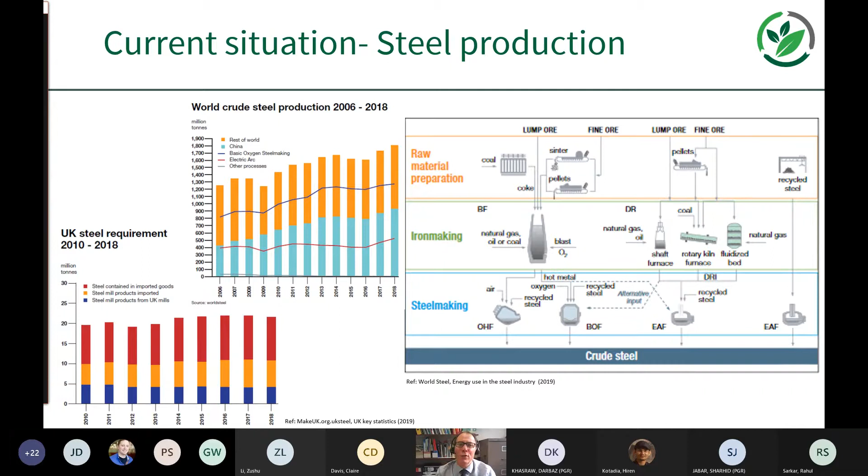Those raw materials then go into the iron making process, and then into a basic oxygen furnace. On the right-hand side, we've got the other end of the spectrum, which would be recycled steel going into the electric arc furnace. In between, we've got other technologies which, although currently well developed, are not always well used - direct reduced iron, shaft furnaces, rotary kiln furnaces, fluidized bed, and a range of other production routes in between the blast furnace and the electric arc furnace.

So what about worldwide production? Well, I guess what I want to emphasize in this slide is that, first of all, global crude steel production in 2019 was 1.8 billion tonnes. It's a massive amount of production there, and it's dominated by two technologies, really: the blast furnace and the electric arc furnace.

The blast furnace itself takes up the majority. About 70% of global steel production is from the blast furnace. And that represents primary production, about 90% of the primary production. And so what we're referring to there is production from mined iron ore, iron oxide, or a variety of different iron oxides.

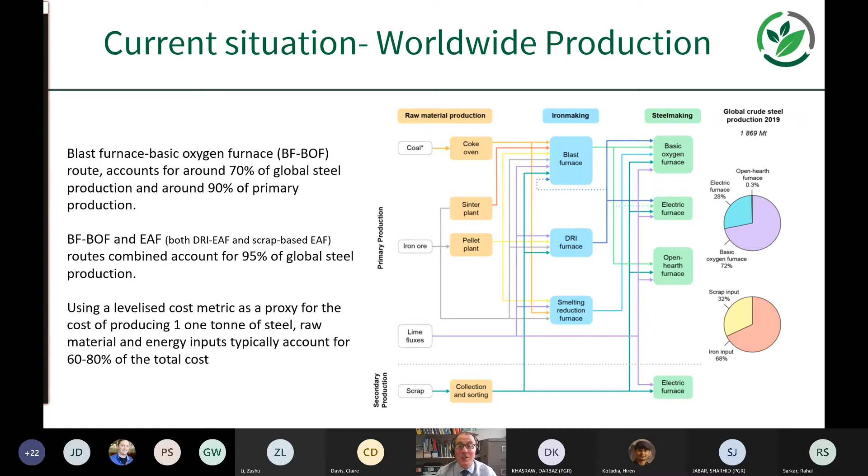Then the electric arc furnace and the blast furnace combined account for 95% of all steel production. So it's dominated by these two real technologies, even though we've got other options open to us. And I think at this point, it's worth emphasizing that it looks like this situation is set for a big change now, because when we're considering reducing CO2 emissions, we're starting to look at some of these other technologies and combinations of those technologies.

So where are we with the current situation with regard to CO2 emissions? On the top left-hand side, I've got a table from the International Energy Agency Iron and Steel Technology Roadmap. They produced a roadmap at the end of last year, actually, that emphasizes where we're at in terms of the specific intensity of CO2 per ton of hot metal. And there's some variation in the amount of CO2 produced per ton.

As you'd imagine, there's a variety of different scales and efficiencies of plant around the world. But basically what we're emphasizing is that the blast furnace has a higher specific intensity, so we're around a couple of tons of CO2 per ton of hot metal. Then the directly reduced iron, which might go into an electric arc furnace, is less. And then the lowest of the current technologies adopted is the scrap-based electric arc furnace, at 0.3 tons CO2 per ton of hot metal out of that furnace - quite a considerable difference.

And in terms of global greenhouse gas emissions, iron and steel is a big part of 2.6 gigatons of CO2 emissions per year, so it produces a lot of emissions. As a percentage, it's usually represented as a percentage of the energy sector's greenhouse gas emissions, where it's 7.2% of those overall energy emissions, and a lower percentage as a percentage of the total greenhouse gas emissions, which are around 49 gigatons of CO2 equivalents per year. So it's a big producer.

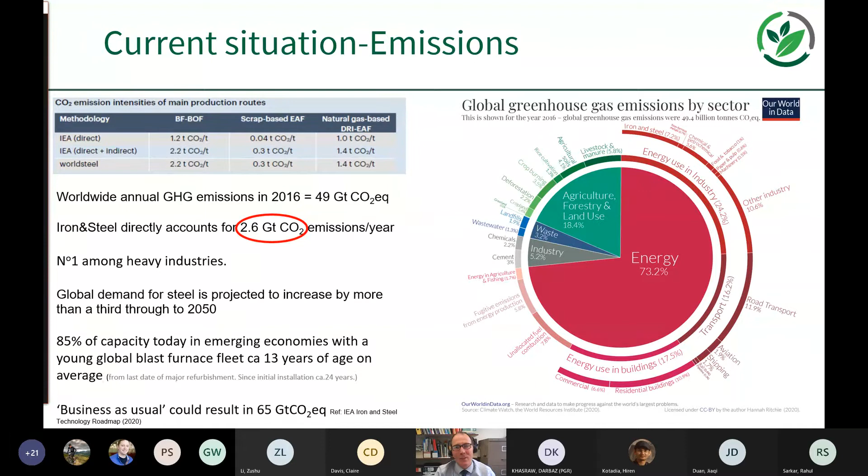So it's going to be quite a challenge to move away from that current blast furnace in those regions. In terms of energy, primary ore-based production is around 15 gigajoules per ton, so it represents far and away the most energy intensive of the processes. The scrap-based route is down at 2 gigajoules per ton, so significantly better, significantly lower energy requirement there.

Just to put some perspective on that, bread takes around 6 gigajoules per ton - and of course that's quite a highly processed material. When it comes to energy, it's number two among the heavy industries. Since the 1960s up until the 1990s, there was quite a rapid decrease in the energy consumption per ton of crude steel production, but the rate of that reduction has now slowed - not stagnated, but slowed. And a lot of that energy associated with steel production is from coal, this coal-derived energy.

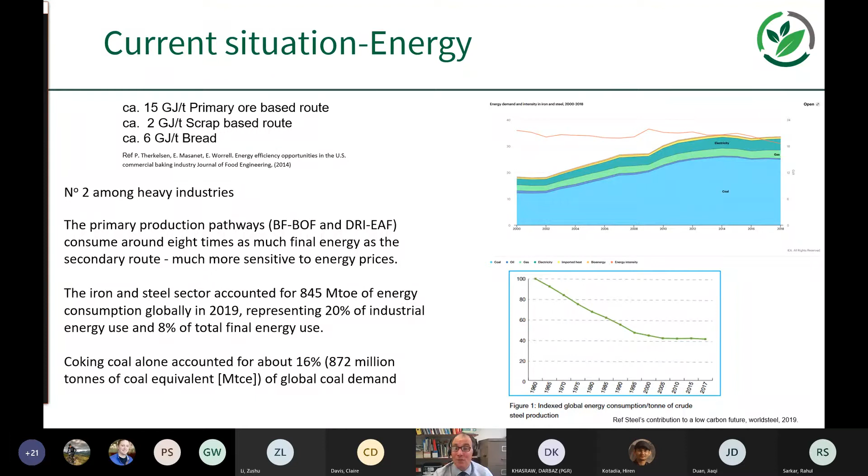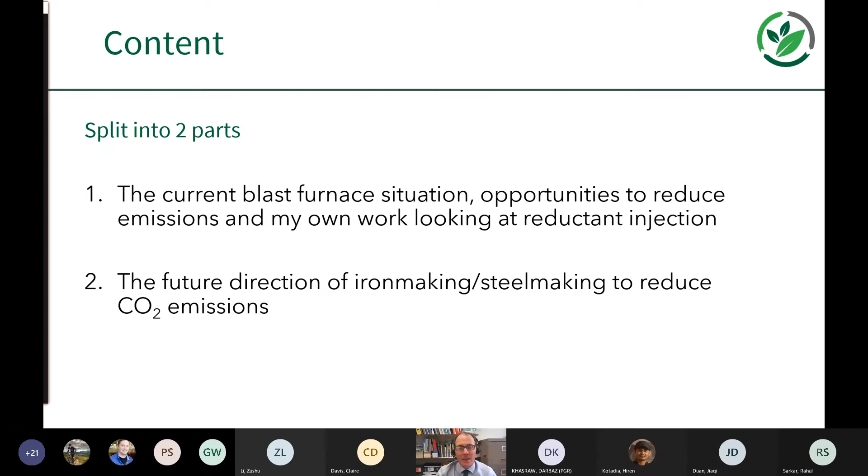My talk is split mainly into two parts. I'm going to look at the current blast furnace situation and opportunities there are to reduce emissions, and I'll reflect on some of my own work and work supported by Sustain. Then I'll look at the future direction of ironmaking and steelmaking, putting it in context with what other countries and suppliers and producers are looking at.

Going through the technology routes quickly: we've got the blast furnace, with its high energy requirement and CO2 emissions as a carbon-based thermochemical process. It requires processing raw materials quite significantly before we even charge them to the furnace, and that results in this energy intensity.

Then we have smelting reduction. That hasn't got the pre-processing of producing coke and producing agglomerated fines in the form of sinter. Like the blast furnace, it also produces a liquid hot metal product, which tends to go into a basic oxygen furnace.

Then we have direct reduction, which uses iron ore directly with gases - they could be syngases, hydrogen, or coke oven gas. There are very well established technologies in place in the industry for producing directly reduced sponge iron in solid form at lower temperature, so the energy emissions associated with it are lower. It tends to be used to improve the quality of the final product from the electric arc furnace. And then, as described previously, we've got scrap-derived steel production from the electric arc furnace.

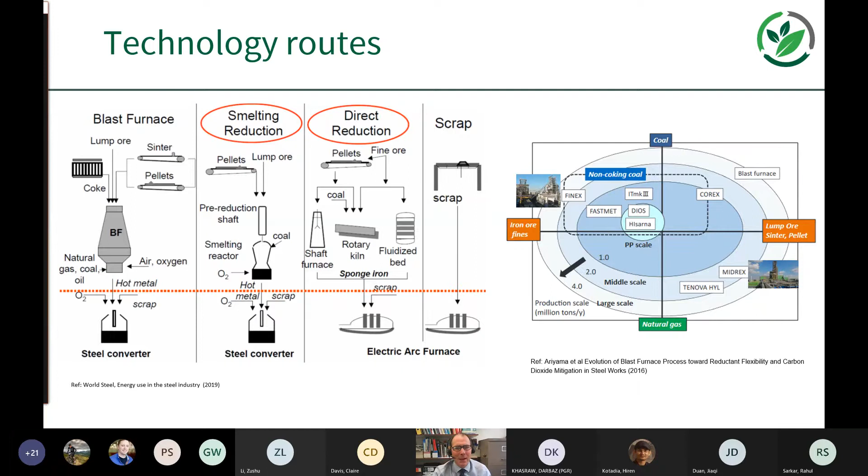In terms of blast furnace ironmaking, the energy balance is very energy intensive. If you ever get the chance to see a blast furnace in person, I really recommend it. These thermochemical reactors are some of the most grand pieces of engineering you could ever imagine - they're massive, the biggest reactors in the world. Not always the cleanest, but the process itself is fascinating.

It's a countercurrent heat mass exchanger. Solid raw materials - coke, iron ore, fluxes - are charged at the top of the furnace, and a heated blast of air is directed in from the bottom. The highest temperatures are at the bottom, typically raceway adiabatic flame temperatures around 2,200, and at the top of the furnace temperatures are closer to 100. Most of the energy comes from this carbon-based coke or injected reductants, like injected coal, which I've been involved with.

Compared to the other technologies, the specific energy balance in gigajoules per ton is highest for the blast furnace.

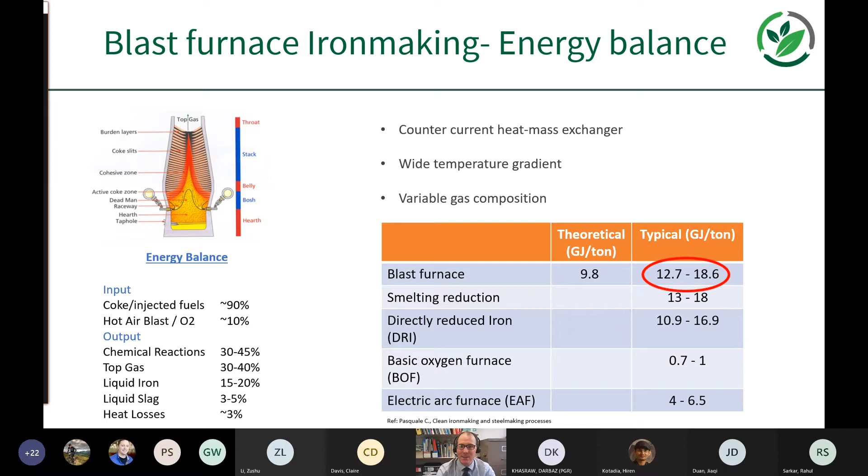Looking at producing steel, the iron containing about 4% carbon goes into the basic oxygen furnace, where that carbon is combusted off. Overall, for that route of making steel, most of the emissions are associated with ironmaking in the blast furnace.

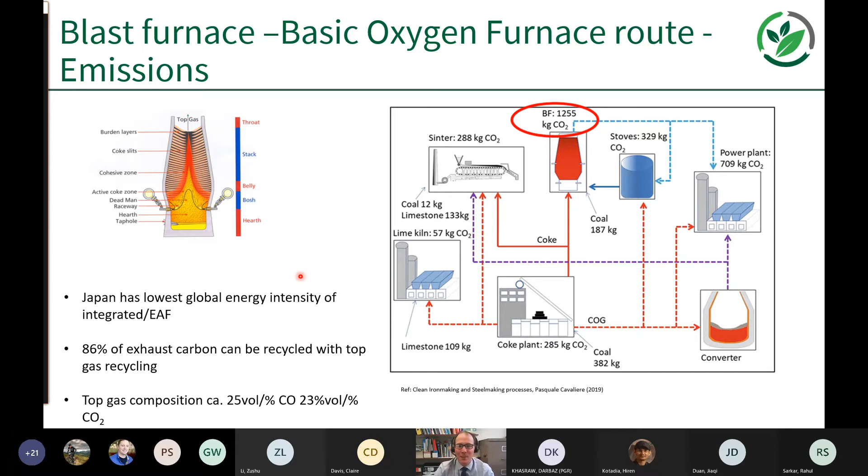This leads on to the evolution of the blast furnace - a lot of this exhaust carbon, in the form of carbon monoxide and carbon dioxide, can potentially be recycled through the process to be more completely utilized.

As a material balance, the blast furnace uses around 2.4 tons of raw materials to produce a ton of crude steel. So it requires a lot of materials as well, compared to the electric arc furnace route, which doesn't require anywhere near the same quantity of raw materials.

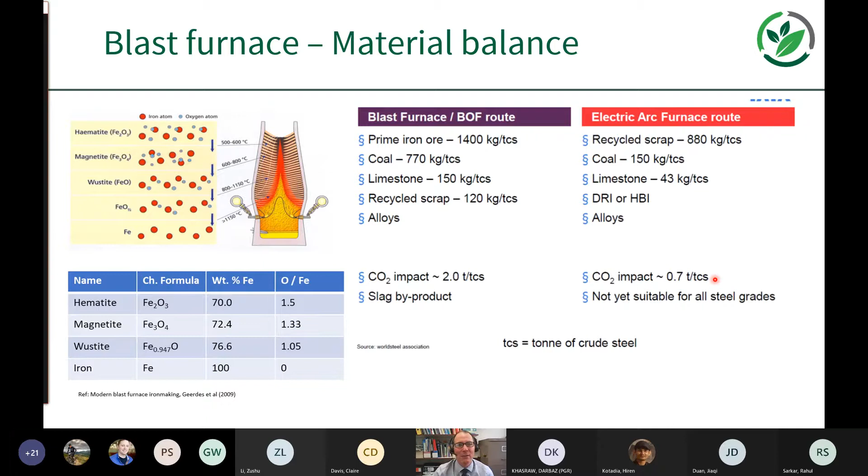Historically, the developments and improvements we've seen have all really been driven by scale. Blast furnaces have increased massively in size. In fact, in 2016 POSCO, the Korean steel manufacturer, started metal production using a blast furnace with an internal volume of 6,000 cubic meters, capable of an annual production of 5.65 million tons - a massive scale. It's an industry that's really improved its efficiency through scale.

On the bottom left-hand side, we've seen some real big improvements in the efficient use of raw materials in the blast furnace - quite significant reductions. But as I mentioned earlier, the rate of reduction in the amount of material going into the blast furnace has kind of slowed down.

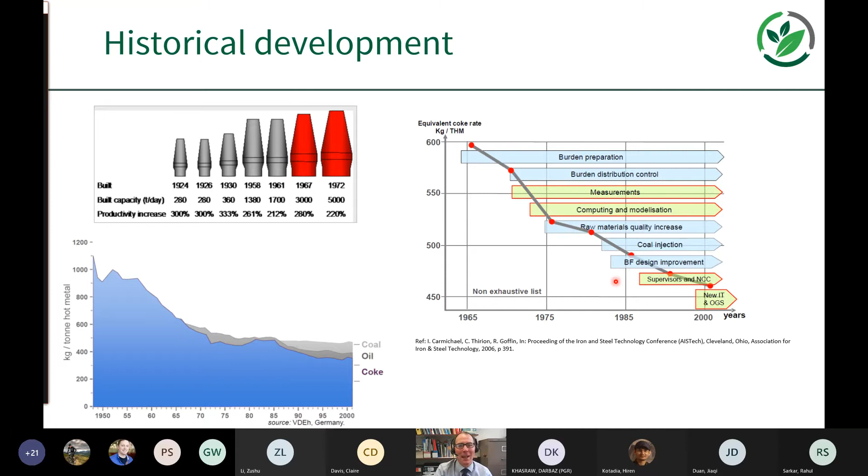We're approaching more the thermodynamic limits of the process. On the right-hand side, we've got technological developments which, in comparison with the reduction in the equivalent coke rate, show quite significant reductions in the amount of coke going into the process. That's been an important development in improving the efficiency of the blast furnace.

So currently, what are the pressures on this route as a viable way of reducing CO2 emissions? It's the greenhouse gas emissions that I emphasized—it produces quite high specific greenhouse gas emissions. Its energy consumption is high. It's a carbon-based, thermochemical reaction.

We're also seeing reductions in the availability of quality iron ores, and also the availability of lump ore, so we're seeing increases in the amount of iron ore fines. That's an issue as well. Ultimately, there's only a limited amount of iron ore that can be extracted from the earth anyway.

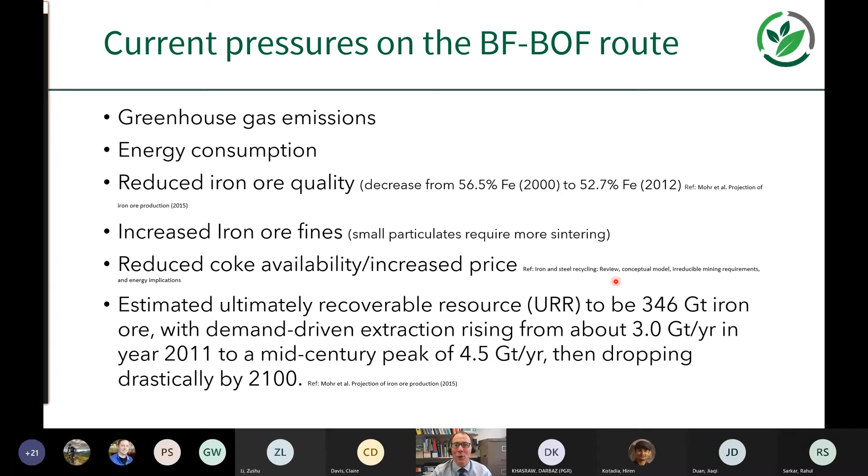So that's background into the industry and the blast furnace itself. Now I'm going to look a little more specifically into some of the work I've been doing—I've been looking at injection coals. I must be honest that the push from the industry really is because coal injection is used to improve the efficiency of the blast furnace, producing more for less materials. It's been driven predominantly by this efficiency, the requirement to use different types of coals that are economically more attractive.

The picture in the center shows the pipes coming down, which are the hot blast—the heated air directed into the bottom of the furnace through nozzles located around the bottom of the bosh area of the furnace. That's called the bustle main, and that directs hot blast into the bottom of the furnace.

And then you've got these braided metal flexes where coal is injected into the bottom of the furnace. On the right-hand side, we've got this cross section of the coal lance, directing coal into the hot blast, and this tends to form a balloon-like void known as the raceway. The raceway is where sometimes enriched oxygen is injected into the furnace, and this is where the temperature really ramps up and combustion or partial combustion takes place.

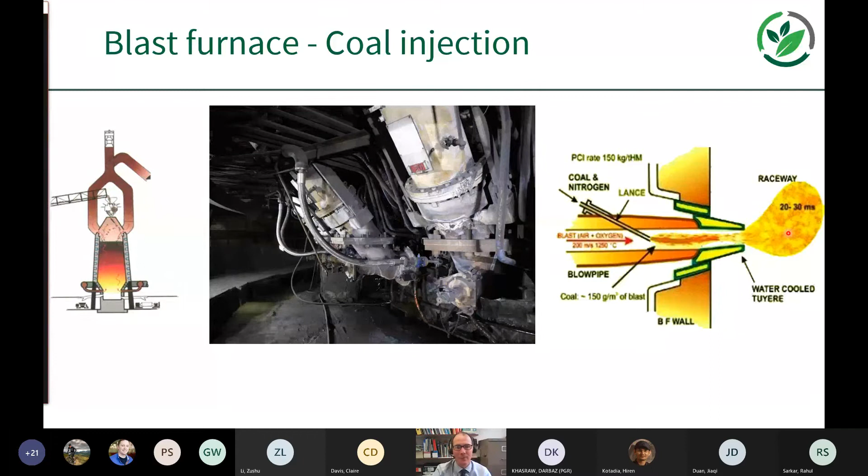And the benefit of using this is it substitutes a portion of the coke. Coke is produced by heating coal in an inert atmosphere, and it requires a lot of pre-processing. There are a lot of emissions associated with it—it's one of those things you try to minimize, really.

So coal injection improves process efficiency, raises the heat, generates a reducing gas, and consequently, by improving the yield, it reduces CO2 emissions. But there are potential issues from it because of particulate emissions, which then hinder the gas permeability through that burden of raw materials, which I explained earlier in the countercurrent reactor.

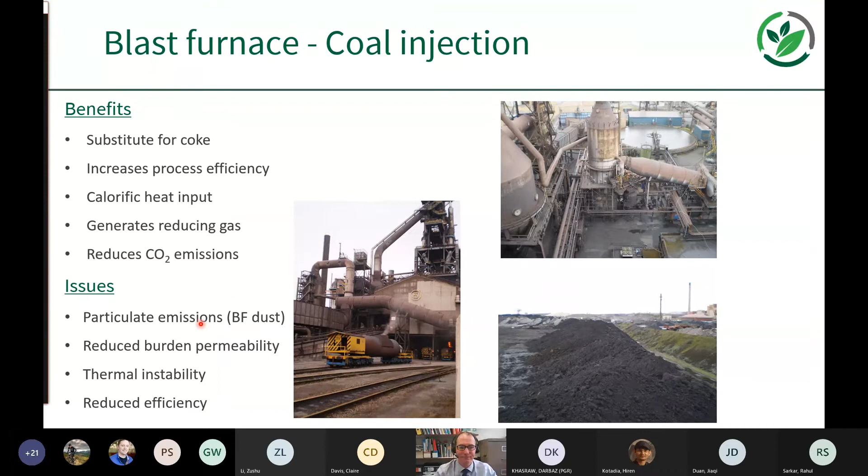In terms of energy, typically the coal injection additions would be up to a couple hundred kilograms per ton of hot metal. So for an output of 4 million tons, typical of Port Talbot, we're talking about 600,000 tons of coal. And you substitute about 0.95 kilograms of coke per kilogram, avoiding that coke production and reducing the emissions associated with it—there's a significant energy saving.

Best available technique data quantifies that at 3.76 gigajoules per ton of injecting coal. So it reduces the energy—there's an energy saving associated with it.

Now, in the UK, Port Talbot uses granulated coal, but most worldwide coal injection is pulverized coal. That saves energy associated with its injection as well, because it requires less energy to mill that coal prior to injection into the furnace.

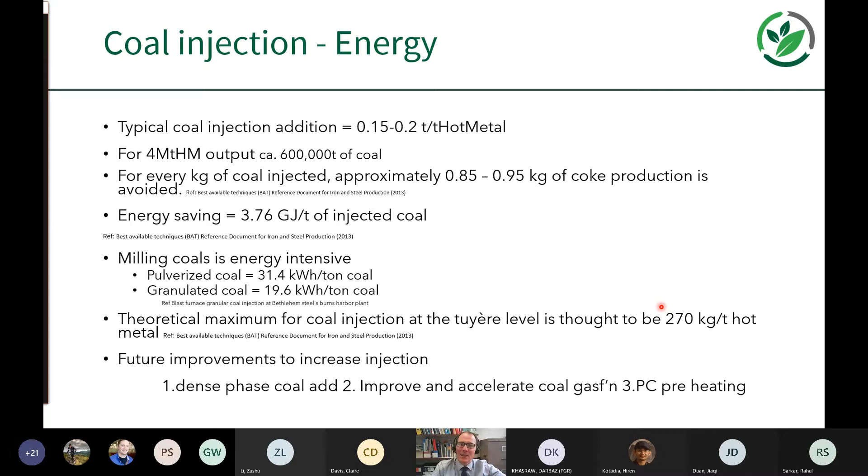Theoretical maximum is around 270 kilograms per ton of hot metal. So there's still some room for improving that, but you require a certain amount of coke in the blast furnace to allow this gas permeability, to allow the blast furnace to function as a countercurrent reactor with solid materials descending and gaseous materials ascending.

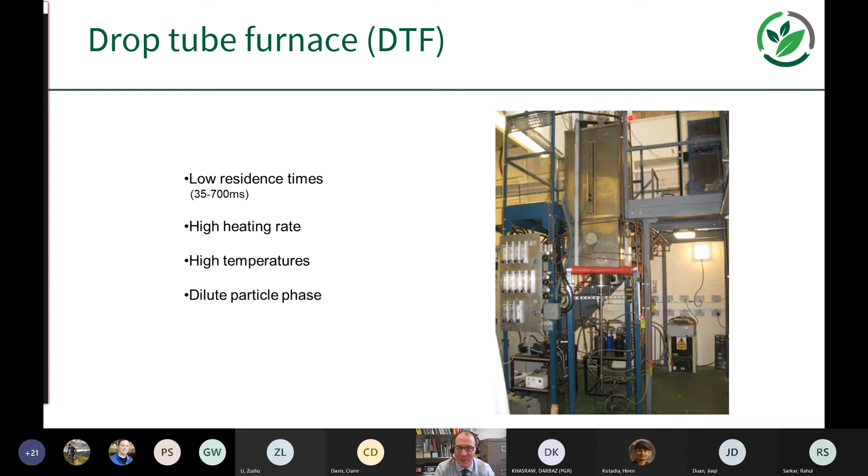So I've been using a drop tube furnace, and we use that to mimic this raceway region, this balloon-like bubble that's formed in the bottom of the furnace when you inject coals. This gives characteristics which are similar to that raceway region: high heating rate, low residence times, high temperatures.

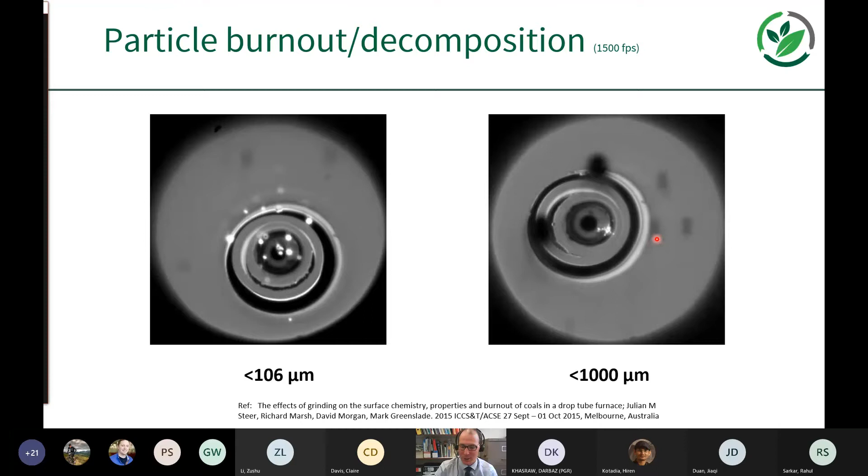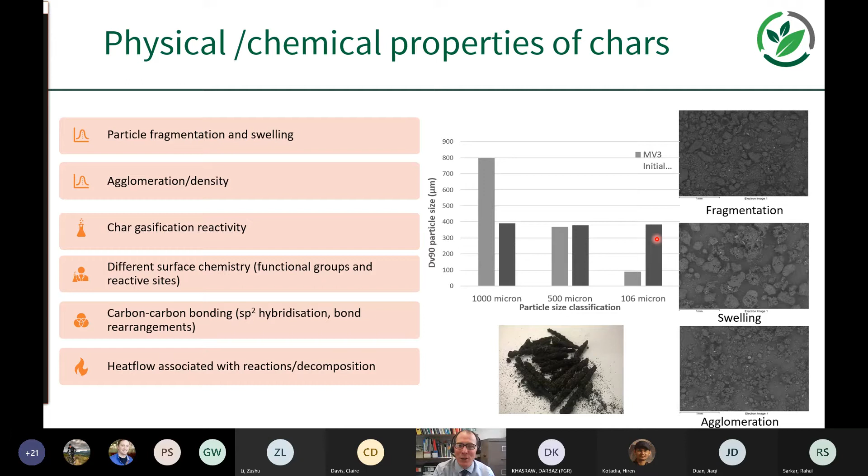So what I'm suggesting is that, when coals are injected, they behave very differently. They burn out very differently, but because they don't completely burn out, it's likely that these chars that are formed then find their way into the blast furnace, and they exhibit different effects like fragmentation, swelling, and agglomeration. All things which are also very applicable to other particulate iron-making processes like Finex, for example, or HIsarna.

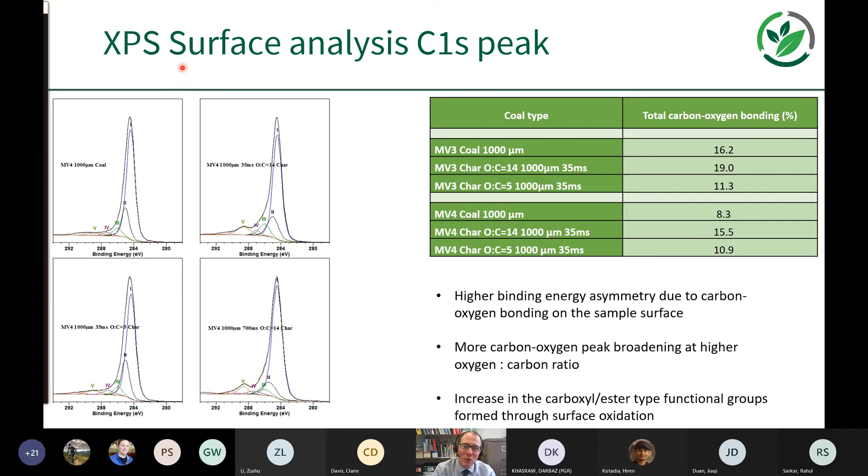On the surface, we've used X-ray photoelectron spectroscopy to analyze the surface chemistry and then correlate that with reactivity to try and improve that. We've looked at the gasification reactivity of these partially burnt chars, because there'll be insufficient oxygen to combust those further in the furnace, so they have to react by the Boudouard gasification reaction then to generate more carbon monoxide.

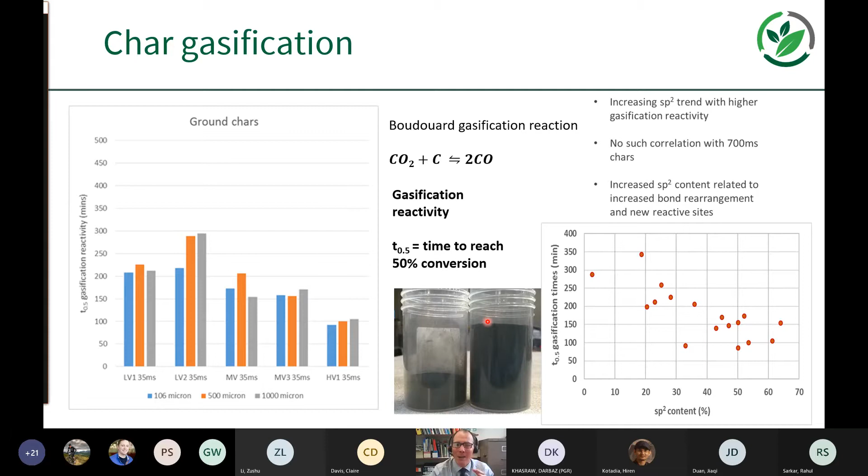This picture illustrates here the difference in the char volume. This is the same massive material - this is the coal, same massive coal and char. So the char can occupy a larger volume, and that has implications on the efficient utilization.

So what I've been looking at more recently is the use of plastics and potentially biomass paper in reducing the CO2 emissions. The importance of this is that potentially there's room to improve the CO2 emissions from plastics injection.

So not only are you repurposing the blast furnace, not only are you utilizing material that otherwise might find its way into landfill, but importantly you're also substituting mined coal. In the process, you're improving the CO2 savings per ton of hot metal, per ton of plastic that's injected into the furnace.

This is not something new, although I have been looking at a combined paper plastics product called Subcoal. Generally, blast furnace operators are either looking at biomass or biomass derived material, or they're looking at plastics. They're not looking at combined synergies that may be there from utilizing that type of material.

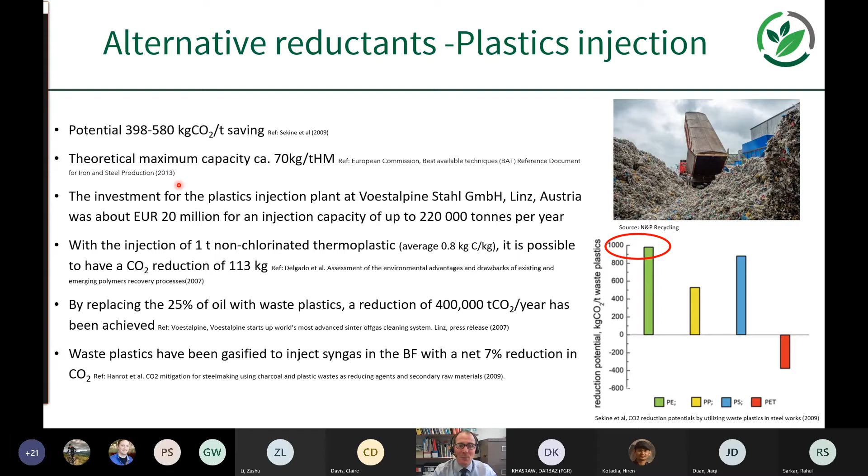But voestalpine use plastics injection in their furnaces. It's well established in the Japanese market. Japan adopted it primarily as a means of dealing with their waste plastic.

I mentioned that my product Subcoal is a 50-50 paper plastics mix. So paper is derived, is biomass derived, isn't it?

But some countries, for example Brazil, which has a well-established sugar industry, and Scandinavia, which has a well-established forest industry, are particularly interested in looking at the use of biomass as a means to reduce CO2 emissions from the blast furnace process, because they've got residues available potentially there. But it's getting those residues in there to realize the CO2 savings.

In particular, this Mathieson has done some research looking at the use of or substitution of charcoal into the blast furnace, where quite significant savings of CO2 per ton of crude steel could be achieved. So demonstrated some important savings there.

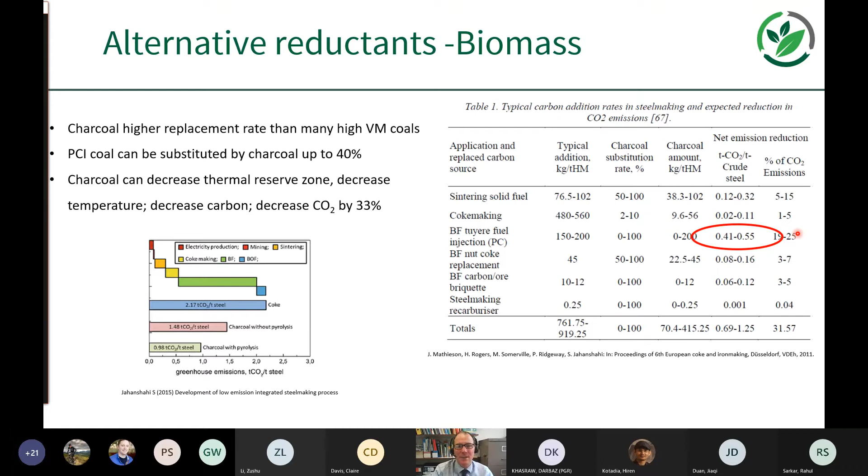So by substituting high reactivity coke, there's the potential to reduce the temperature of that process - a low temperature blast furnace. Also, by either reducing gases such as coke oven gas or natural gas, reformed natural gas, there's more potential to reduce emissions. Oxygen blast furnace or advanced oxygen blast furnace, top gas recycling - all ways to modify the blast furnace.

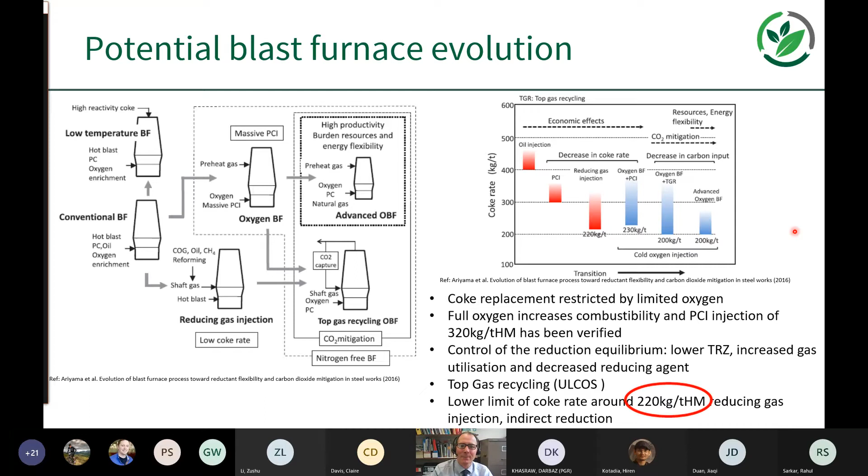So this potential evolution from the conventional to the oxygen blast furnace could drive blast furnaces to be smaller and produce a higher calorific gas that's more useful, converting to more useful byproducts associated with the conventional blast furnace. With higher concentrations of CO2, they're more readily separated, stored, or utilized. And potentially, if we're talking about hydrogen in the blast furnace, hydrogen production by electrolysis would also generate oxygen, so it could be synergistic to this development of a higher oxygen blast furnace.

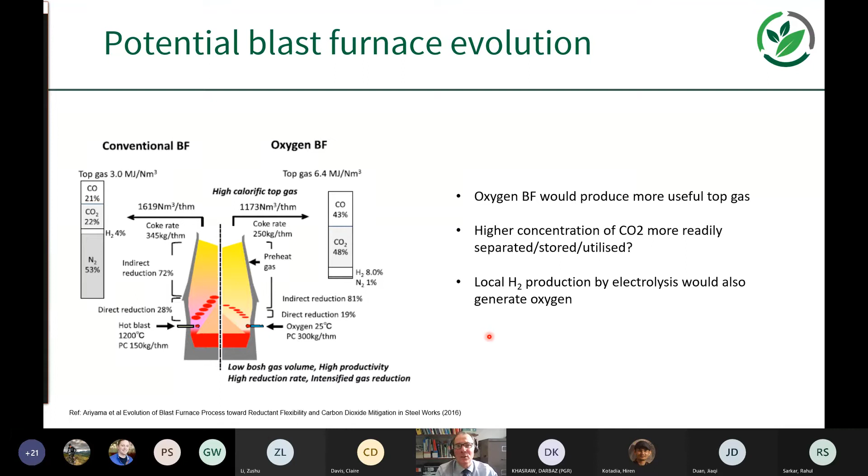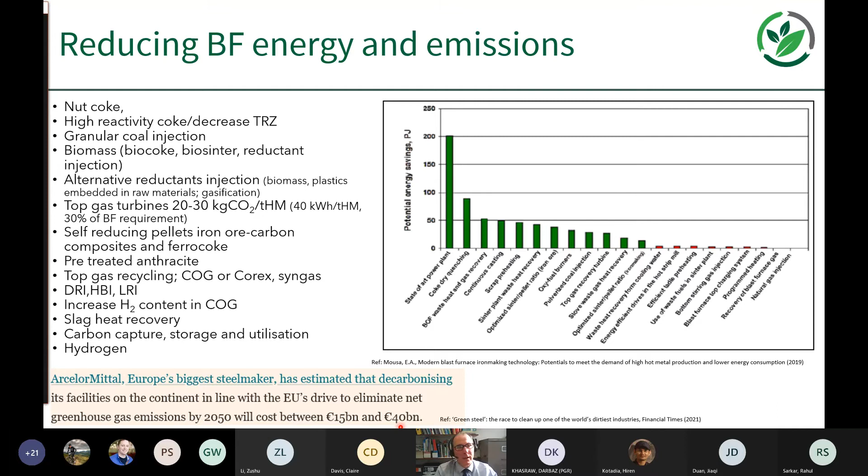There's quite a list of potential ways to reduce blast furnace energy and emissions, with significant savings associated with state-of-the-art power plant and coke dry quenching instead of the wet quenching that continues at the moment. A recent article in the Financial Times quoted ArcelorMittal, Europe's biggest steelmaker, estimating that decarbonising its facility on the continent, in line with the EU's drive to eliminate greenhouse gas emissions by 2050, will cost between 15 and 40 billion. So significant sums of money are going to be required to rejiggle this industry.

With secondary steel emissions, there's already significant opportunity to utilize savings. In the blast furnace, we're talking about innovative process modifications - top gas, oxygen, high oxygen, etc. If we increase secondary manufacture from scrap use, we get associated emissions reductions. Biomass, carbon capture, hydrogen instead of carbon monoxide as a reductant, and alternative technologies like direct reduced iron, hot briquetted iron, or low reduced iron, or even electrolysis from molten iron oxide salts.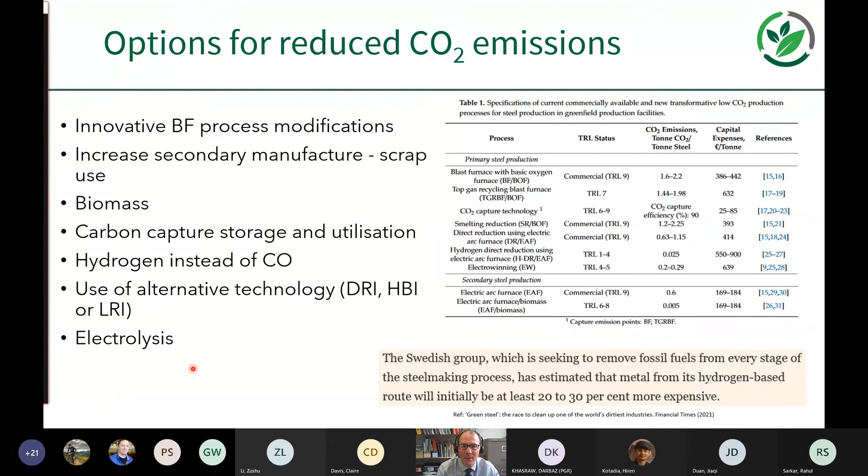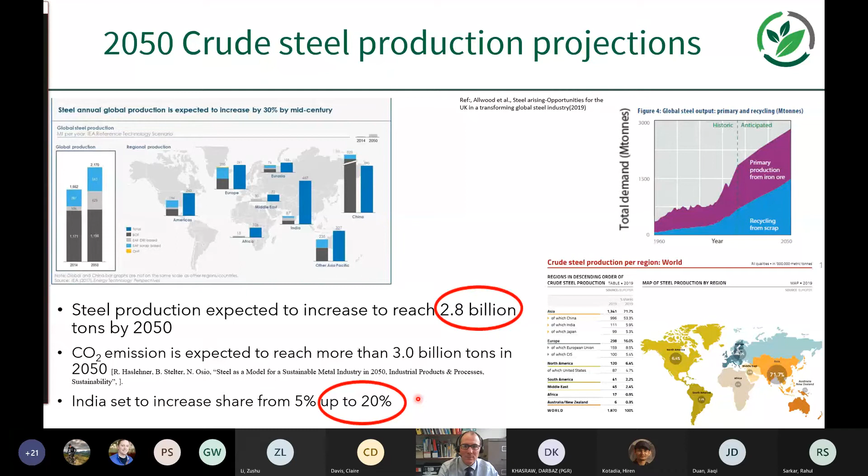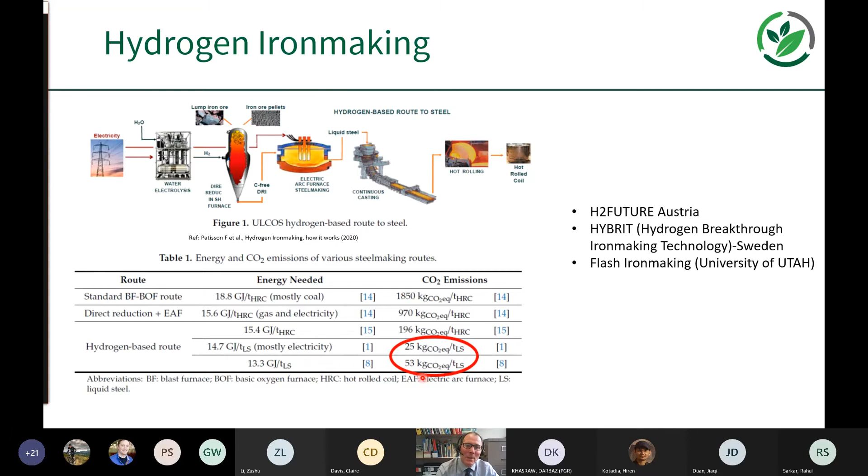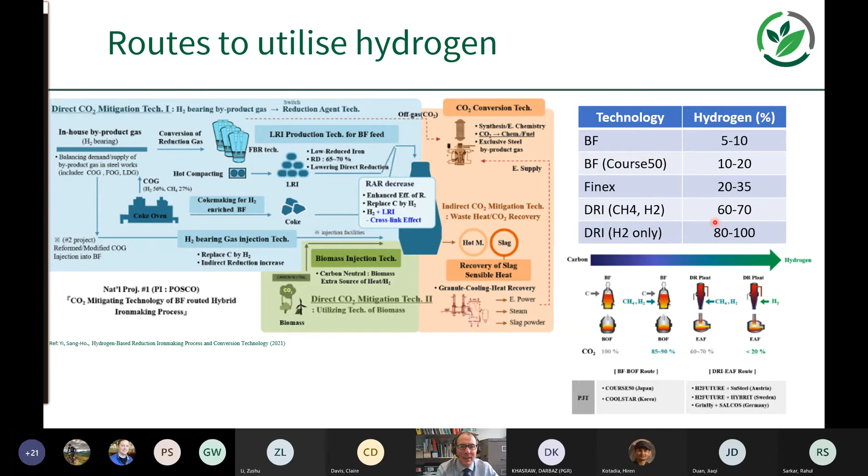So I mentioned hydrogen briefly. Hydrogen really has stellar potential to reduce CO2 emissions, and there are a couple of hydrogen projects in the pipeline at the moment in Austria and Sweden, with significant potential to reduce emissions in iron production using this hydrogen-based route. There's a variety of different ways it can be incorporated into the blast furnace, but there's a limit to what you can put through it. It can be incorporated at a much higher level in direct reduced iron production, or potentially, if used as the only gas in direct reduced iron production, incorporation could be very high, and associated CO2 emissions would be much lower.

So, hydrogen in the blast furnace, although it reduces pressure drop - which is beneficial because it's lighter and less viscous than carbon monoxide - the reduction of iron by hydrogen is endothermic, so it has a heat requirement. This affects the heat balance, which limits the overall amount of hydrogen you can put directly into a conventional blast furnace. There's also the issue of supplying hydrogen.

The current annual UK hydrogen production is around 24 million cubic meters per day. For an output of 4 million tons of steel per year, that would require 6.72 million cubic meters of hydrogen per day - about 28% of current UK capacity.

Important in this consideration is how we produce that hydrogen as well - whether it's produced by methane reforming from fossil fuels, or whether we combine that reforming with carbon capture and storage to produce what's termed blue hydrogen, or whether we're generating it by electrolysis. I did some back-of-the-envelope calculations, and green hydrogen production by electrolysis would require somewhere in the region of 14 terawatt hours per year.

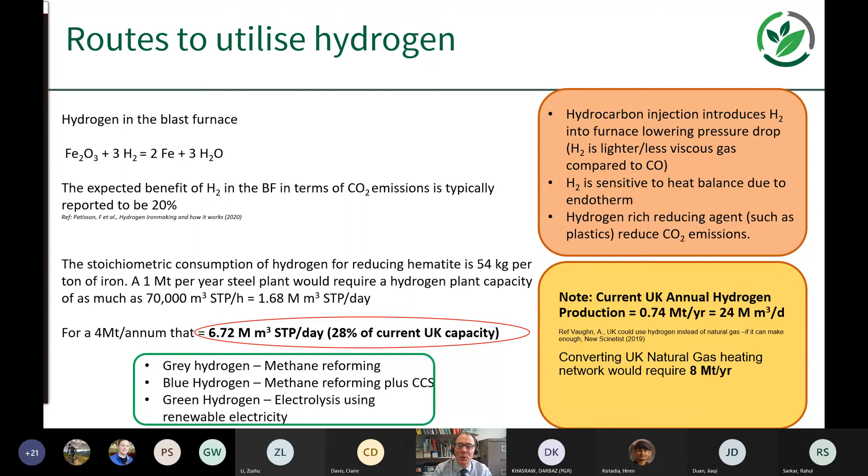The current UK solar generation is 13 terawatt hours per year, so there'd be some significant requirement to increase the hydrogen capacity.

In terms of scrap-based steel making, it requires less energy and produces much less CO2, so it's got a lot going for it. We talked about the electric arc furnace, but other options being considered include this primary energy melter by SMS group, which is also readily available now.

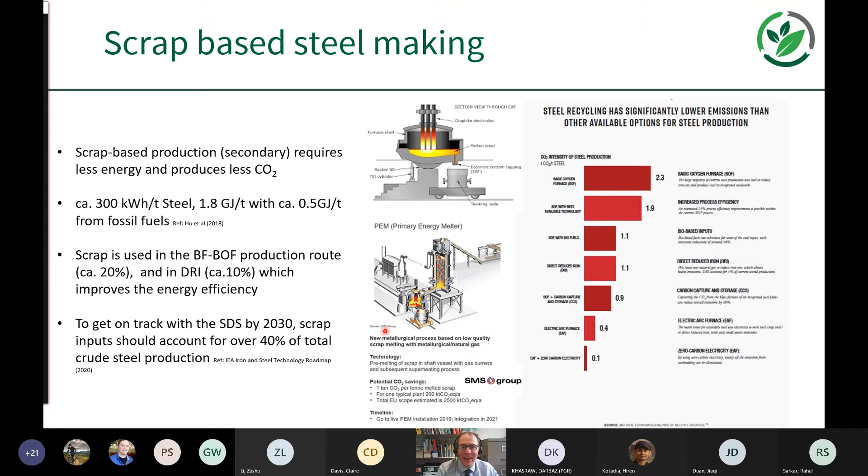Particularly important, we export a great deal of our scrap, over 8 million tons a year. The global scrap market is set to treble, and we can see the necessity to use more scrap, so there's significant opportunities there.

But when it comes to competing, the UK needs to address things like the disparity in electricity price, and consequently the knock-on effect onto the final product price. And then there's issues of scrap contamination, and currently it tends to be used for lower quality end products.

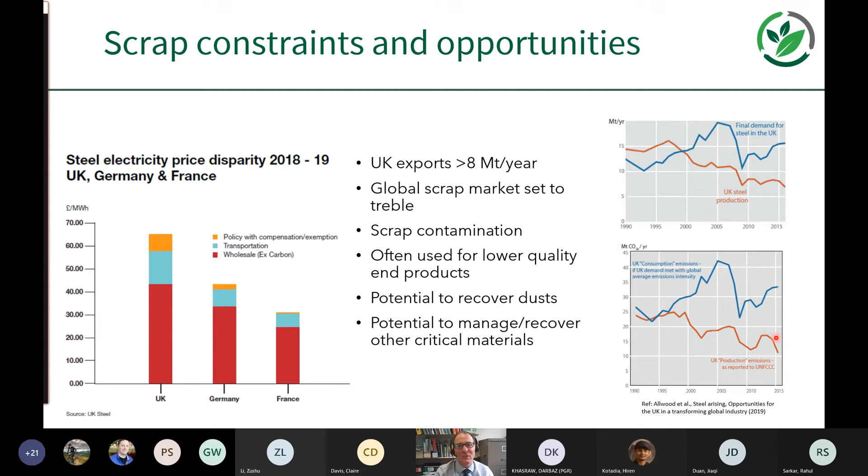On the right hand side, you've got figures which show our UK steel production going down and the emissions going down for the production, but our consumption emissions are increasing. So there's this necessity to really deal with this consumption as well.

So now finally, I'm just going to go quickly over some of the options that are available and being looked at in other countries.

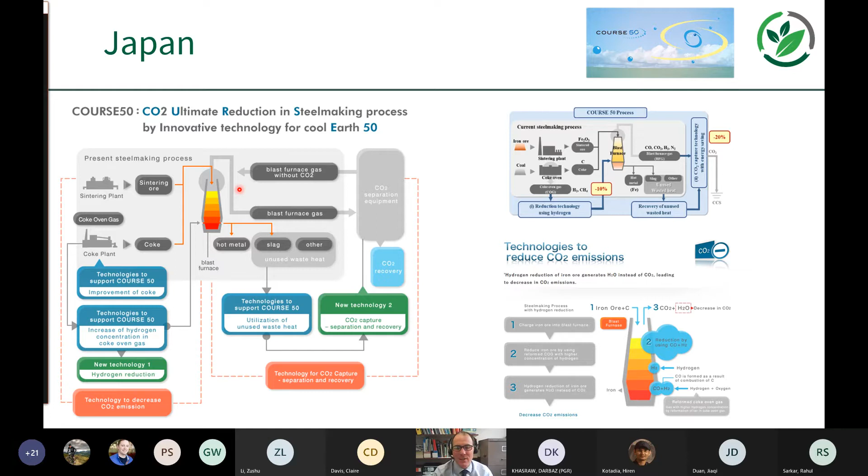In Japan, they are technology leaders in iron and steel making. They've got a program called Course 50, and they're looking at - it's still a blast furnace centered CO2 reduction - but this is through innovations in the blast furnace, carbon capture, increasing the amount of hydrogen used in the blast furnace, and energy savings as well.

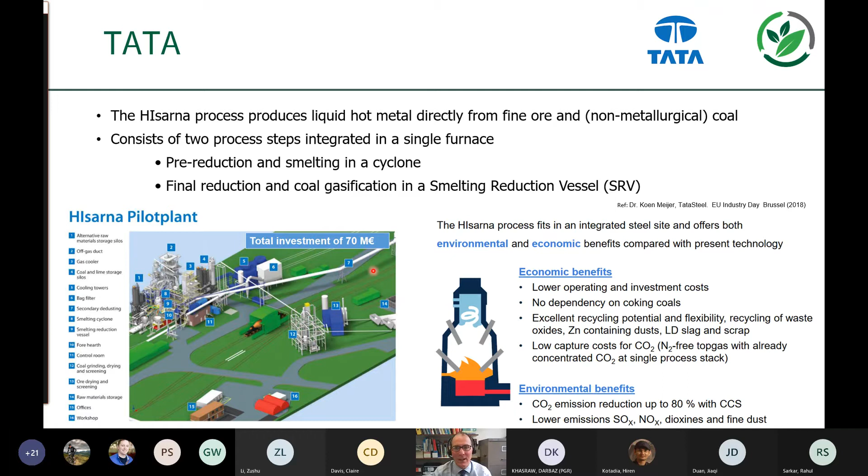I know your group at Warwick are looking at the HIsarna process with Tata Steel, and this is a really interesting smelter reduction technology. Some interesting interactions - gas-solid, gas-liquid, solid-liquid interactions between particulates - which are very interesting from a scientific point of view. The potential to reduce CO2 emissions by around 20, maybe more percent, but requires this carbon capture to really utilize big CO2 reductions.

Thyssenkrupp in Germany have quite a well-established and clear vision. This arrow on the timeline for 2050 illustrates their projected evolution for their steel production, and from their 4 blast furnace setup here incorporating hydrogen, they aim to use direct reduced iron in conjunction with hydrogen production, and then more complete conversion to utilizing hydrogen, and then utilizing hydrogen for direct reduced iron into 2050.

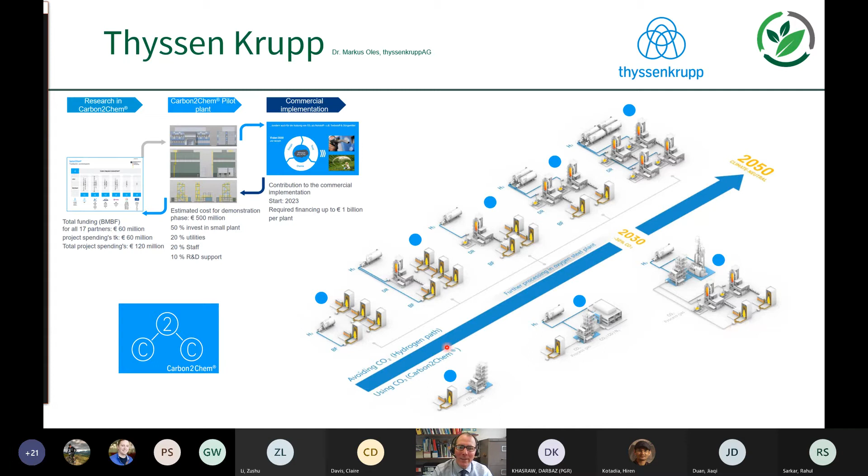And then concurrently, they've got this carbon utilization program as well, where they're aiming to utilize carbon dioxide from the top gas.

ArcelorMittal are really active in this field, and they're looking at all different aspects, quite diverse - that's kind of what's striking, really. You've got reduction using this plasma torch, where they're using natural gas dry reforming reaction. So you've got methane reacting with carbon dioxide to produce carbon monoxide and hydrogen as reducing gases in the modified blast furnace, with quite significant savings per ton of crude steel there.

And then they're also looking at using the top gas with the Steelanol project in conjunction with LanzaTech, who are using the CO2 from the top gas by a biological fermentation, gas fermentation, conversion to bioethanol.

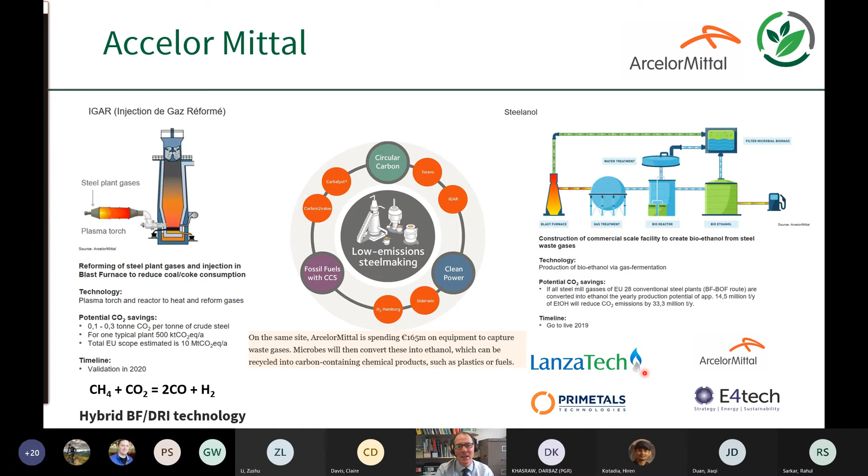And then we've got direct reduced iron, which tends to go into the electric arc furnace predominantly. Well-established technology, centered around countries that have a large natural gas resource, where they produce this sponge iron, a product that goes into the electric arc furnace.

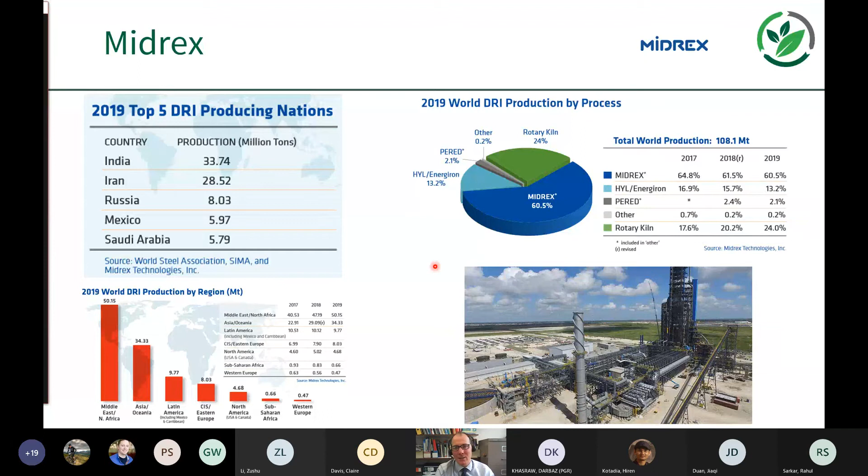And up to now, although these technologies have been scaled, Midrex have got technologies that are capable of producing 2.5 million tons of liquid metal a year, tons of steel per year when used in conjunction with the electric arc furnace. But as we've seen from the overall steel consumption, production and consumption worldwide, it's still dominated by the blast furnace.

And then we've got some more novel opportunities in the form of electrolysis - Boston Metal Company, Siderwin, another one supported by ArcelorMittal. And then there's also an equivalent within the ultra low carbon steel making program in Europe too.

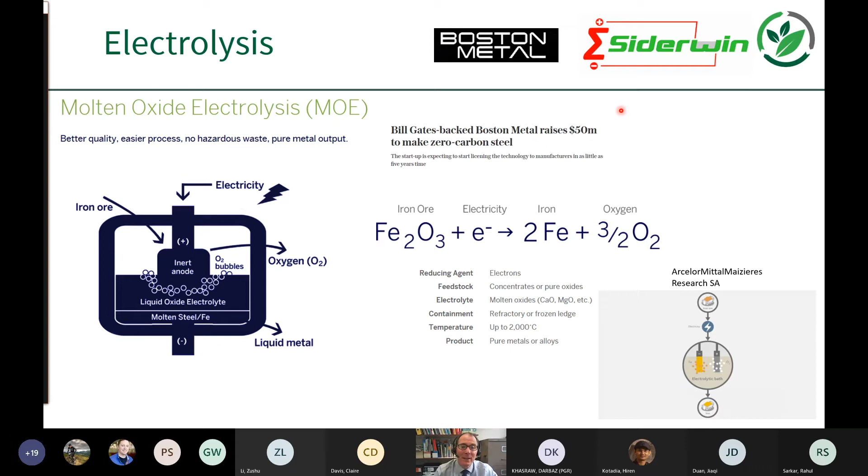The World Economic Forum, International Energy Agency, and World Steel are all driving towards and projecting a vision of decarbonisation, a pathway to 2050. It's interesting to see that they have mentioned demand management, but surely demand must be a big part of dealing with these emissions in the future.

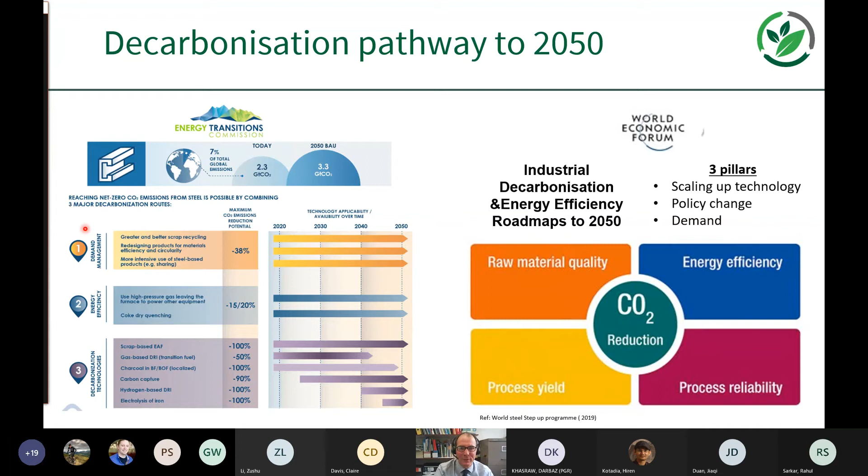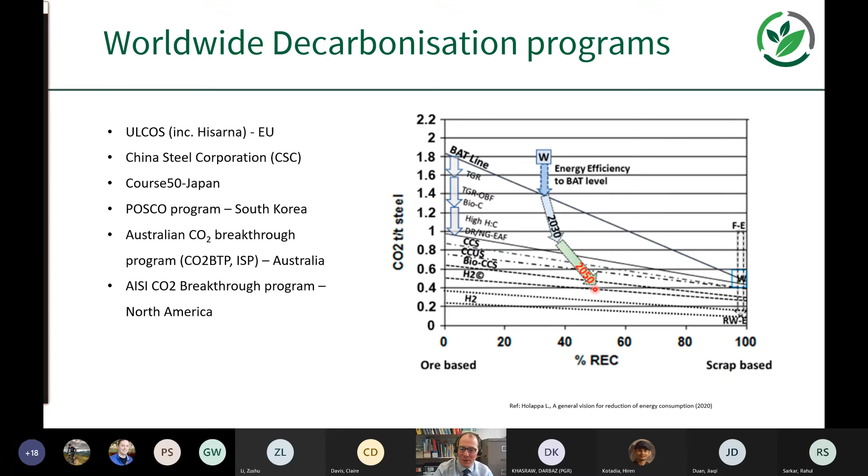These worldwide decarbonisation programs that I've listed on the left, the ore-based higher specific carbon dioxide intensity processes, are driving towards changes and evolution in the blast furnace: top gas recycling, oxygen blast furnace, using biomass, carbon capture, and hydrogen to drive down CO2 produced per ton of steel. So the trend is from where we currently are with the worldwide average, to utilize more scrap-based production and move this down to a lower specific CO2 production per ton of steel.

So the IEA roadmap sets out key ways that governments are going to help achieve this: providing R&D funding, creating a market for near zero emissions, adopting mandatory CO2 emissions reduction policy, and expanding international cooperation, developing the infrastructure that's required. There are going to be significant partnerships and collaborations required to deliver this.

The current market activity suggests that multiple approaches are going to be the order of the day, really, fitting policy, circumstances, resources, investment, and social acceptance. All the while, as well as this consumption and production of steel-based goods, a green economy is going to be supported by this steel production.

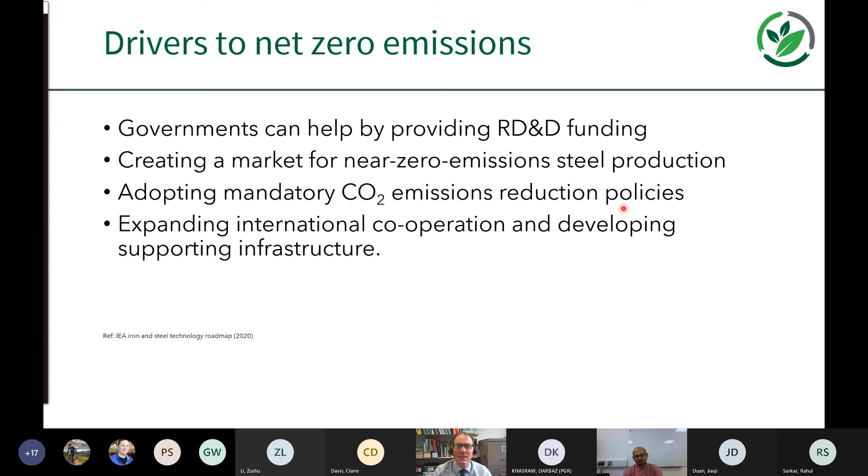So finally, when you consider the breadth of activity to reduce CO2 emissions from iron and steel making in Europe and worldwide, I think it emphasizes just how necessary networks like Sustain are to cover what's going on, and there's a focus for activity in this sector.

It's a really exciting time for iron and steel. And above all, I hope the industry is given a proper chance to be part of that solution, which takes account of the whole story, accounting for both our consumption and our production-based emissions, not just our production.

So thank you very much for your attention. I know I've probably gone over a little bit of time, but I hope you found it interesting, and I'll answer any questions. Thank you, Julian.